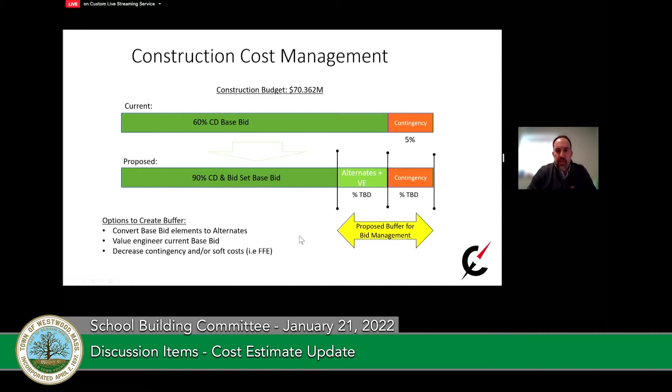Next slide, please. We'd like to come back at the February meeting with the list of what we, and Dore Whittier, would recommend as potential value engineering decisions, potential options for alternates, and potential budget manipulation, so that when we get to bid day in May we have a three-pronged approach, a plan A, B, C, and D, if you will, for ways to manage the budget.

We'll have another check of this strategy with the 90% CD set, and I think we'll just confirm at that point how we want to proceed. Also at the next meeting, we'll determine what's going to be an alternate in March, and in February, what the scope is for the value engineering.

But then when we get to the meeting in March, we will need to prioritize those alternates so they can be put in the bid documents that way. And then we'll go out and do another cost estimate at the 90% set, which will help verify what we think for the values of those things.

And then eventually get to a bid set where we're ready to go out to bid. We have a list of alternates, we've done our VE work, and we know the budget moves we'd make on bid day, so we're as confident as possible that we'll be able to manage whatever we see come bid day. So we wanted to give you a heads up on the next seven months of what we're doing, at least from the budget perspective.

There's going to be a lot of other things going on for the project as well in the background, like bidding and pre-qual. But from a main decision point for the committee, this is where we'd like to go, this is what we're recommending. We just wanted to get that in front of you today to see if there are any questions or concerns, and if not, we pretty much have a roadmap of where we'll be in the next couple months. So I'll stop there and turn it back over to Maya to see if there are any questions or comments.

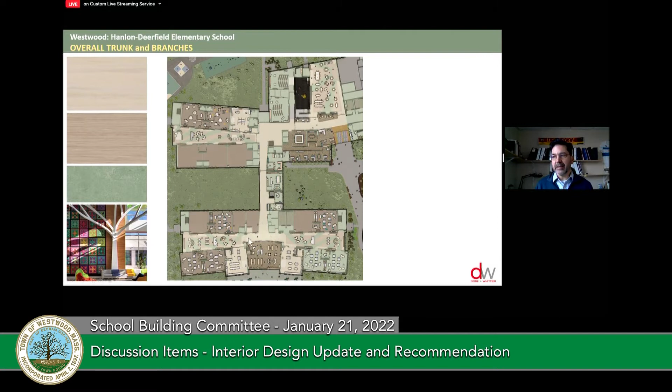Walking through the trunk and branches of the building, we've got very neutral colors integrated into the main passageways, extended learning areas, and the cafeteria, soft neutral tones like sage green with natural wood and fabric providing an extra pop.

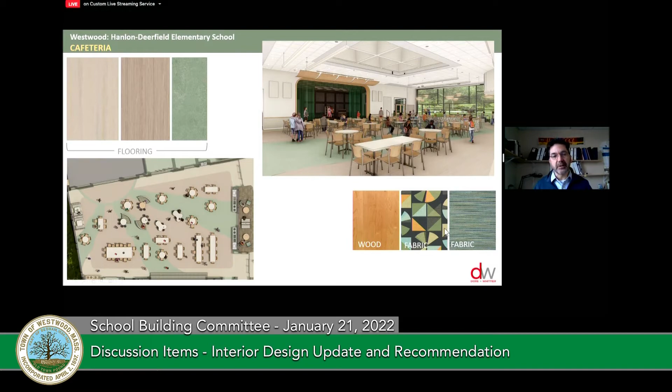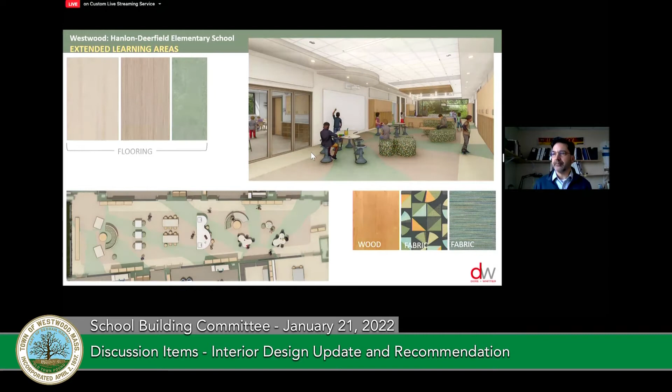In the extended learning areas, the same idea with very neutral tones. Then in the classrooms is where we've decided to give a little bit of an extra pop of color, outlining each of the different wings with an accent color.

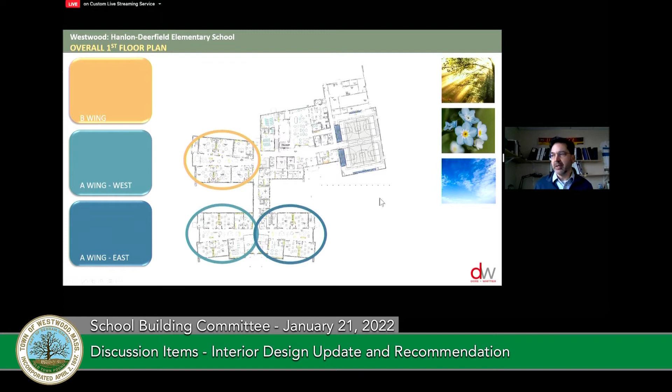In the B wing, which is kindergarten and first grade, we've got a yellow accent. In the A wing west, for second and third graders, it's a light blue, similar to a light flower. And in the A wing for the older fourth and fifth graders, it's a darker blue, more representing the sky.

This is an example of a classroom where we're integrating the yellow into an accent wall, which is a teaching wall in each of the classrooms. In the floor, most of the tile is neutral color, but there are also accent colors.

So the carpet tile would be yellow, and it's actually a flocked flooring, even more resilient than regular carpet, similar to airport carpeting. It's very easy to clean — Ken took it through its paces with spills and cleaning up and so forth.

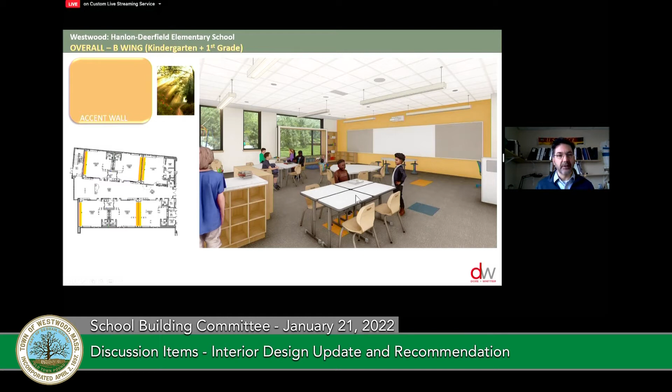The rooms with the yellow accent walls will have a bit more of the yellow tiles, but we'll also integrate the other colors so that all three colors are represented in each of the classrooms.

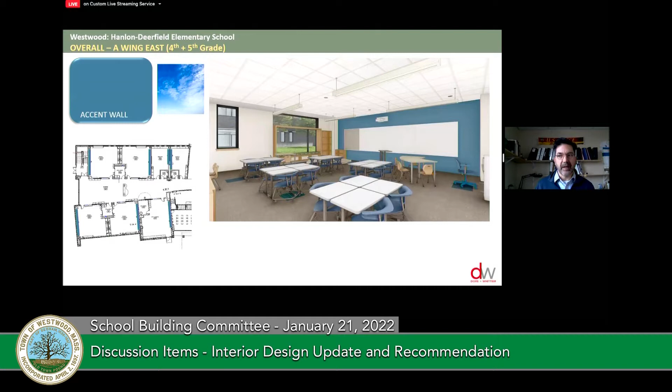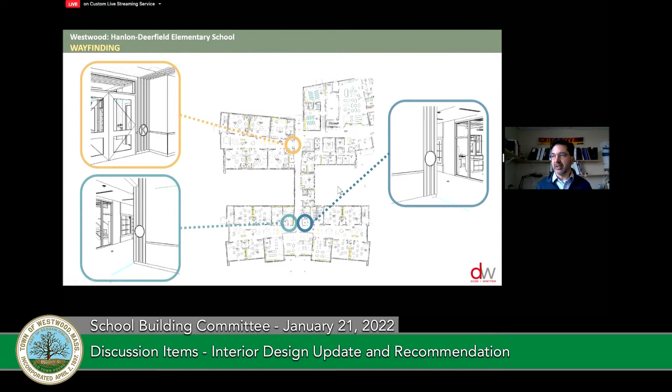Integrated into these, we're proposing to use a glass panel that could have a K to represent kindergarten or a 1 to represent first grade, providing wayfinding designation for each of the different wings, located at each entrance or opening into each of the three wings on each level.

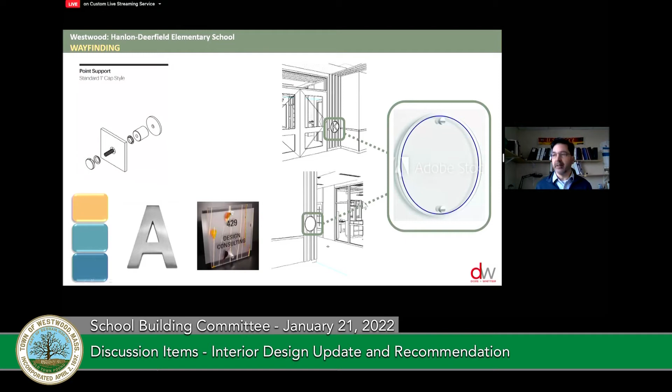So it would be something like this. And this is flexible, so it can be changed out or interchanged if the school decides they want to change things up over time.

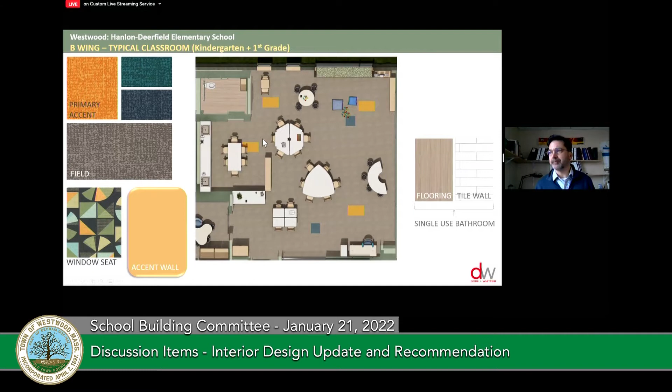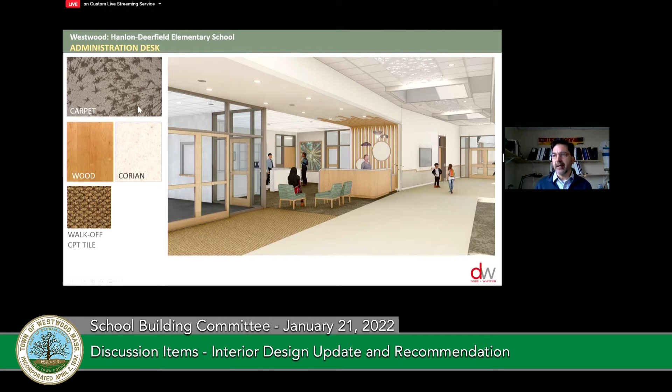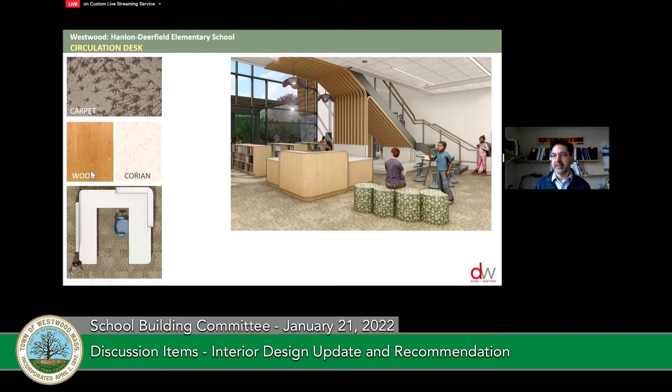At the circulation desk in the library, a similar appearance with solid surface, wood, and carpeting.

One of the things that came out of the discussion was to relocate what we were previously showing as a sink behind the circulation desk. So we've isolated that into a separate area so that it's really just for book binding, repair, and that sort of thing. To make the circulation desk more functional, we've relocated that to another wall in the room.

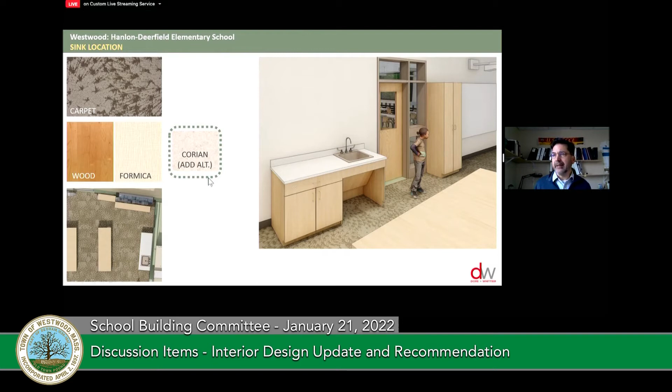And that was the door leading into the STEM room.

I think our thinking right now is that they would be consistent throughout, and this is probably something we need to adjust. Our recommendation is to have some variation in there because it's a little more representative of the tree, but maybe not a large variation—maybe very subtle. But if there's a preference for one or the other, we're happy to make any adjustments needed. Okay, maybe we can just raise that with the designer and make a note to circle back to that. Sure.

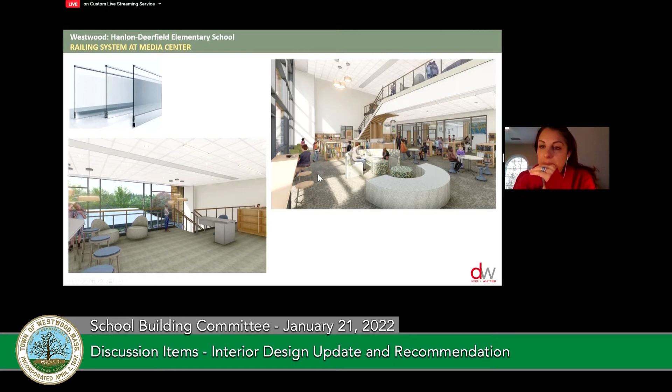The direction we were given from the Aesthetics and Design group is to come back with a couple other options on the patterning and how to integrate that. Also to look at extending the ceramic tile so the sheetrock doesn't come down to the floor, for maintenance purposes, so the ceramic tile continues across. And also to look at other options for the icon designation of a boy and a girl—it's a sensitive component, so we'll look at a few other options on ways to designate that makes sense.

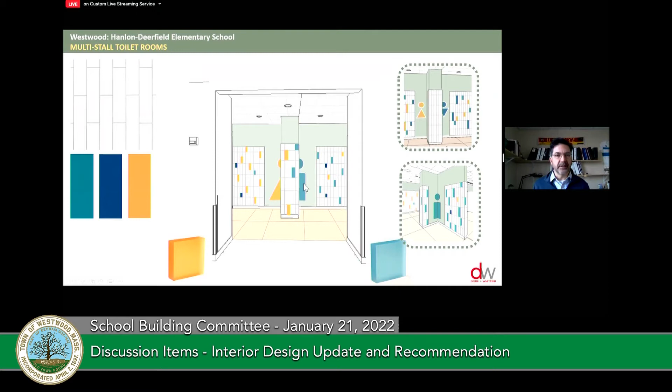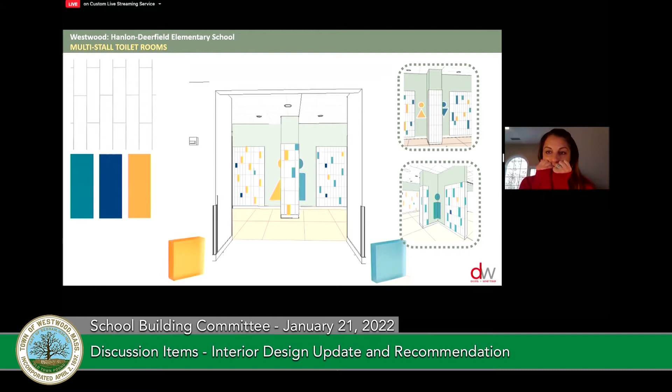Just so people understand, can you go back, Rob? This is an airport-style bathroom—think of when you're in the airport, there's one giant entryway, you walk in, and men's is to the right and women's is to the left. There's no door closing off these bathrooms. This style is now being incorporated into a lot of schools, and teachers have said it's preferable for being able to monitor the kids. So picture an airport bathroom, that's really what this will look like, and this is in all the bathrooms. We do have single stall bathrooms throughout the school, but this is for all of the boys' and girls' multi-stall bathrooms.

At the gallery, this is the main entrance, and you come down the corridor past the music rooms. There's what we're calling the gallery space, right where the stairs lead up to the second floor. This is a highly visible corner of the building where students and everyone will be traveling through to get from one end of the building to the other.

Our thought is to have a mix of tackable surfaces where teachers can post images or things students are working on, and then a mix of acoustical panels on the wall to provide a bit of acoustic buffer for that space.

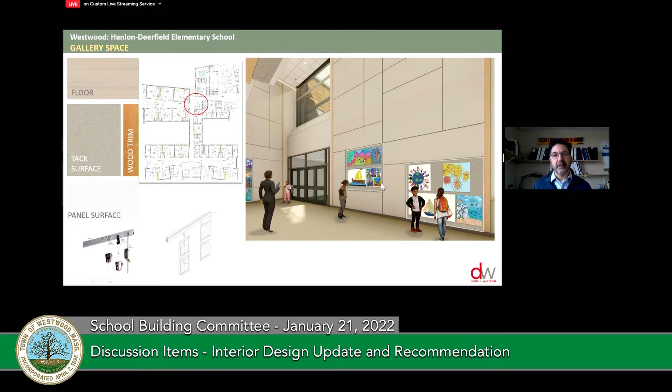So the result of that discussion was that we'll reconnect with the school district to talk more in detail about the height of the tackable surface and exactly where we want that located. Then we'll continue on with that discussion.

Rob, this is Michelle. This may be in the weeds and may be for later, but is there consideration for— I love that area to display artwork, but as we combine schools, there's probably something for each school that they already have, tradition-wise. I know in one of the schools they have pictures of each 5th grade graduating class that I'm guessing they want to keep, and I imagine that's true at both schools. So that might be something to consider—what do we need space for, what do they want to carry through, especially as the schools combine? It's probably down the road, but just wanted to put that out there.

Yeah, that's great, any insight or comments like that is helpful. We do have a number of 3D display cases integrated at a few different locations in the building, so I think having that discussion about what types of things will want to be hung on the wall is important. Maybe there are other locations where we don't have tack boards, but something can just be hung on the wall. We can definitely work through that.

I'd just add, I think that's an important point, Michelle. We're going to have to do a lot of thinking about how we preserve the history of the two schools, and also how we bring together the two communities and really integrate them into one community. Maybe instead of each 5th grade in both schools creating what they've always created separately, maybe they come together and create something that gets put there. I think that'll be a fun aspect of thinking about those kinds of culture issues.

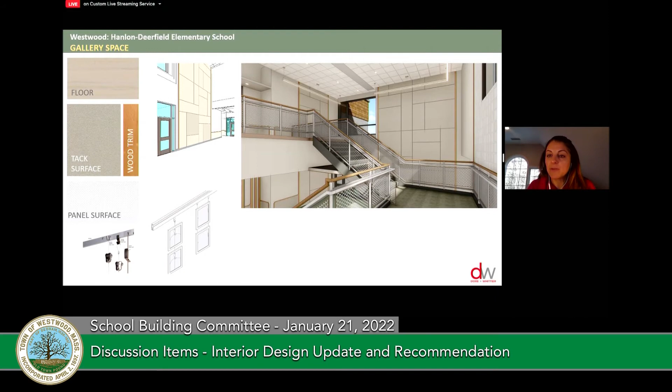Great. Any more comments about the interior selection? Because we are going to be voting today on whether or not to accept the recommendations of the Aesthetics and Design Subcommittee. So there will be a vote later.

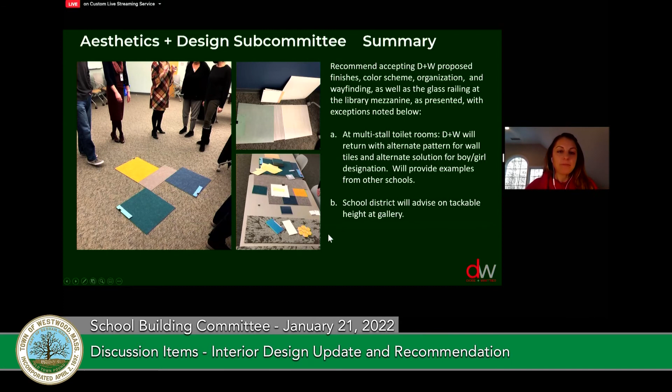Nope, okay. So the next piece is just providing a summary of our permitting process. We met with the Planning Board and the Conservation Commission - we had 3 Planning Board hearings dating back to October, and then 2 Conservation Commission hearings, one back in October and one more recently this month. We'll summarize what we reviewed with them. We received approval from both the Planning Board and the Conservation Commission.

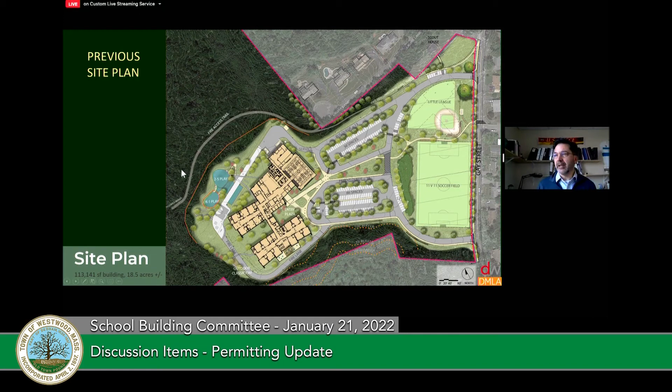They had their independent peer reviewer, Beta Engineering, review all of our drawings, and we went back and forth and made some modifications that were recommended to finalize the product. This was the previous site plan we were showing, and some of the modifications we made were, as requested, we expanded the width of the soccer field, or multi-use play field, from 210 feet to 225 - so it's 5 yards wider than it was.

As a result, we expanded the drive here to accommodate that, which also allowed us to retain a little bit more of a clump of trees in the central area. We made a larger curve in the entry drive, and modified a little bit of the parking to accommodate that, which shifted some of the balance of the parking.

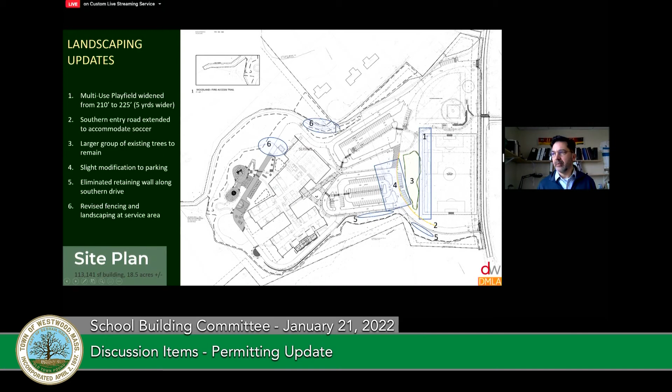We were able to eliminate some retaining walls we were previously showing along this southern drive, which helped reduce cost and also makes it nicer since you don't have to have a visual retaining wall or fencing here. We were able to grade that out and make it work. Along the top, we adjusted the fencing so it comes back in and meets the gate, and then relocated some landscaping at this corner where the walking trail meets the fire access trail.

So this is just a blow-up of that. We did have some fragrant sumac located along here - we relocated that to provide this sort of naturalized buffer and transition between the fire access trail and the school property, and then adjusted the fence so that it comes back, providing a bit more containment.

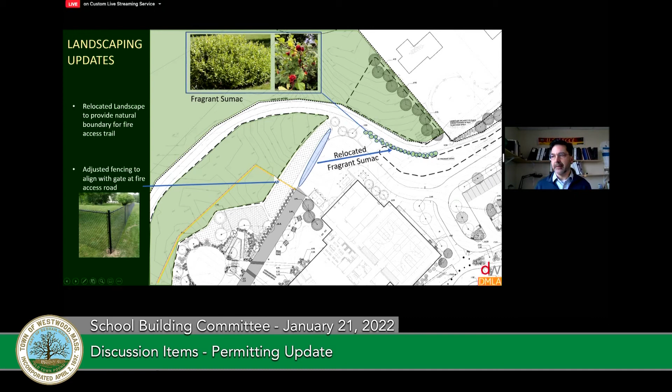The planning board was looking to have this be solid fencing, but we talked them through that process and highlighted that it's really just to provide a border perimeter for the students, so they were fine with that.

Looking at the southeast corner, we revised the grading to accommodate that adjustment in eliminating the retaining walls. We went over this closely with both the planning board and the Conservation Commission, and they found this acceptable. They are a little concerned with making sure we protect the wetlands during construction, so we'll be taking close steps to ensure the contractor stays away from this area during the early days of the construction process.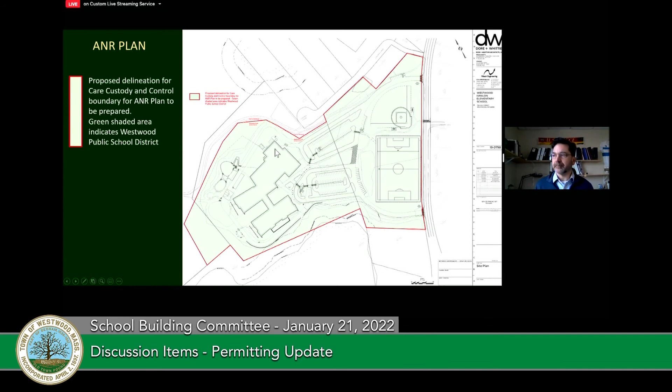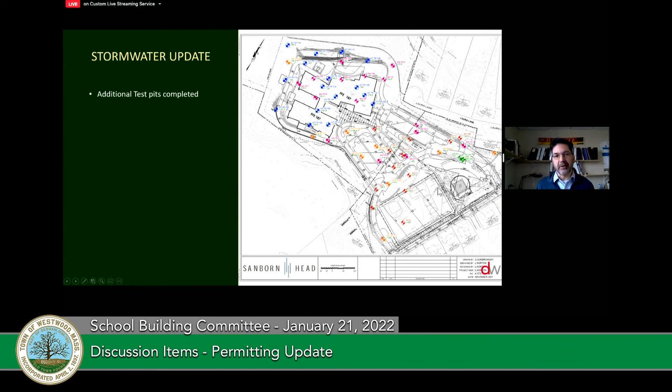Regarding the stormwater updates, we did some additional test pits. This plan shows all the test pits over the multiple different times we went out there to complete them, represented by different colors for test pits and borings. The additional test pits were requested by Beta Engineering to really have a solid understanding of the soils for stormwater, and they were satisfied with all of that work.

Additionally, we relocated the underground stormwater galleries. You won't see them, they're all underground, but they help filter the stormwater from the roofs and the pervious pavement. There was one located to the north side of the building that we relocated. We updated our calculations and report, updated our HydroCAD model, and revised the plans to address any items and comments that Beta Engineering had.

We provided dewatering specifications for during construction, to manage any water from the geothermal wells during construction, or as a result of any water found on the site during construction. We've got a plan for that.

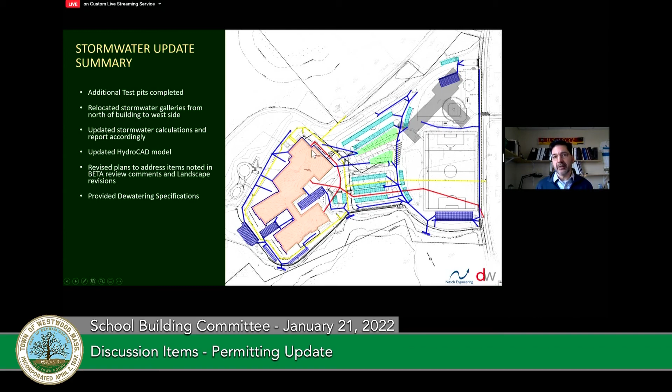And that's it, so I'll open it up to any other questions, comments, or reactions people have.

Is the Beta review you mentioned an independent engineering review? Yes, it is, and they're hired by the town. They're an engineer the town uses for essentially all their projects.

Just thanks for taking all the feedback that we gave you, including the extra 5 yards on the soccer field, that I think could be a big help. Thank you for working through that. Yeah, you're welcome, happy to do it.

Is there designated snow removal? Like when they clear the parking lot, they're gonna have to put the snow someplace. Is that incorporated into the stormwater plan? Yeah, so we had a meeting with DPW, and went over with Ken as well, thoughts on where the snow plowing, where the snow could get pushed. We designated a few different locations for that.

One of the things we also did, along the east side of this drive, aside from the parking areas, we eliminated the curbing. That also helps facilitate pushing snow into the grassy areas in the wintertime. We did have that discussion with DPW and the school district.

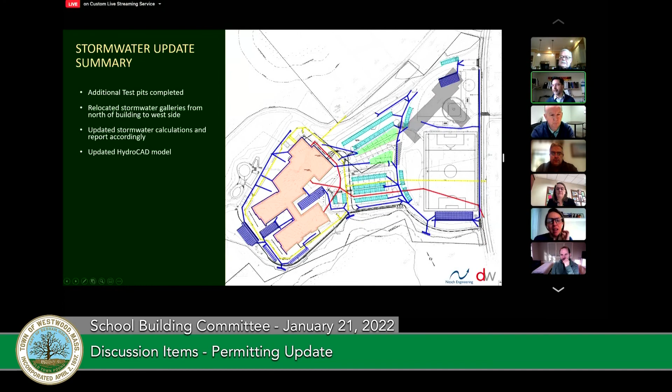Any other questions? I have a question about the fence around the playground. I know we're trying to keep it in the woods, right? Yes. I'm just curious, is that constructible? Like with fencing contractors, you have an auger machine, you have concrete. I'm just concerned about them being able to maintain the woods and keep that fence in place.

Yeah, I mean the woods, while there are a lot of trees there, it's not super thick, it's manageable. They're likely going to need to cut down maybe some small trees, but they'll be working around the larger trees that are there and leave those in place. We don't anticipate that to be a big issue. Okay, great.

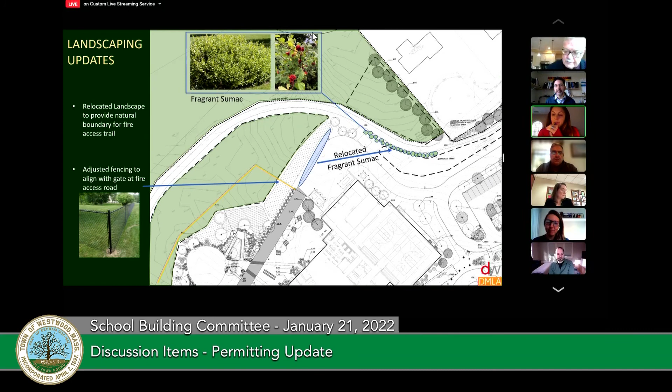All right, any other questions on the permitting? No, okay. We are going to move into action items.

The first action item is a motion to approve the 60% cost estimate submission to the MSBA. So moved, seconded. Roll call vote: Josh yes, Brian yes, Allison yes, Tom yes, Chris yes, John yes, Charlie yes, Pam yes, Mary Kate yes, Jen yes, Abby yes, Lemma yes, Josepha yes, Matt yes, Carol yes, Michelle yes. Tony had to jump off. Emily yes, and I am a yes. Motion is carried.

Next, I need a motion to approve the Aesthetics and Design Subcommittee's recommendations on the interior finishes we saw today. So moved, seconded. Roll call: Josh yes, Brian yes, Allison yes, Tom yes, Chris yes, John yes, Charlie yes, Pam yes, Mary Kate yes, Jen yes, Abby yes, Lemma yes, Josepha yes, Matt yes, Carol yes, Michelle yes, Emily yes, and I am a yes. Motion is carried.